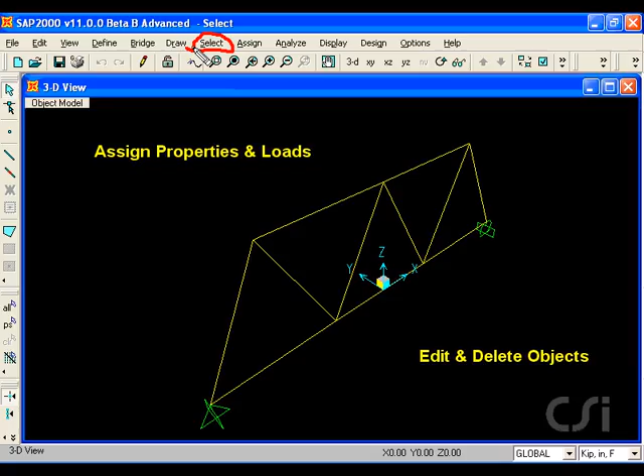This tutorial will illustrate some of the select options available within SAP 2000. Selects are used to assign properties and loads, to edit and delete objects, and to selectively display tabular data.

The first select is the pointer window command, which is also available on the toolbar. It is active when depressed. A single click on an object will select it. This same command can be used to do a window select. Drawing the window from left to right will select all objects that lie completely within the window.

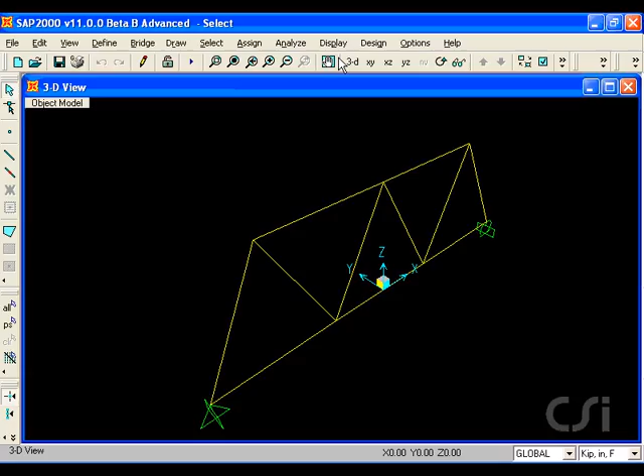If we use this command once more, but this time draw the window from right to left, not only will any object lying within the window be selected, but any object touched will also be selected. Note that selected objects are highlighted with dashed lines.

Next, we will use the polyselect, which is similar to a window select in that any objects which lie within the polygon are selected. Next is the intersecting polyselect, which selects any objects touched by the polygon or which lie within the polygon.

A powerful selection command is the specified coordinate range select. Here we can identify if the objects need be completely within the range to be selected, what types of objects to be selected, and the range in each direction. Here we are asking all joints to be selected.

We will use the same command once more. Again, only selecting point objects, but this time we will set the selection range in the X direction to be between the values of 0 and 300. This selects only the joints on the right half of the truss.

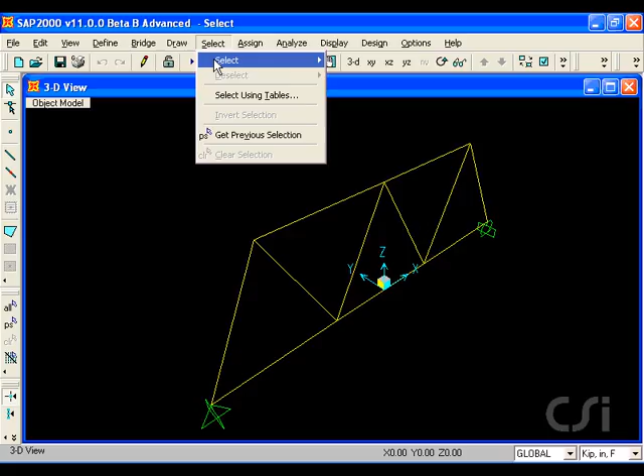All objects lying in a given plane can be selected by using the Click Joint in Plane commands. The Select Lines Parallel To command allows for the selection of all line objects parallel to a given line, axis, or plane.

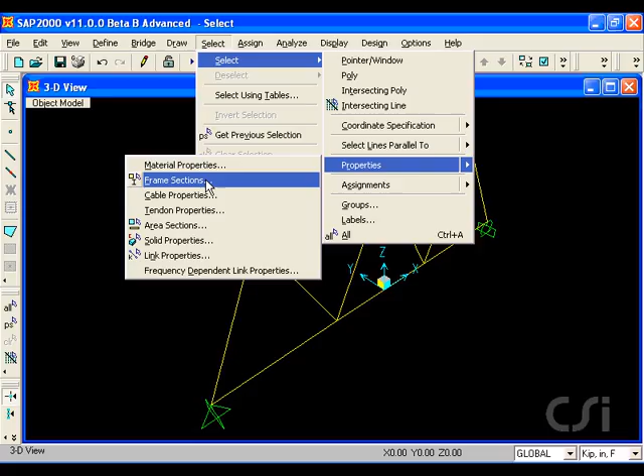The Select Properties command allows for the selection of objects by the properties assigned to them. Here we select by frame sections. We can also select by joint assignments. Here we wish to select all supports that are restrained in the global X direction.

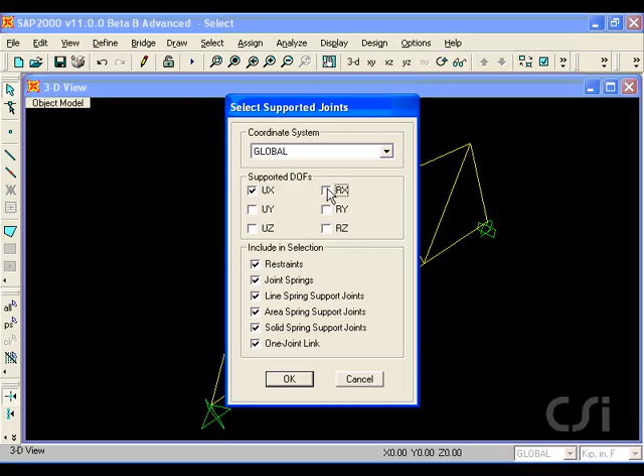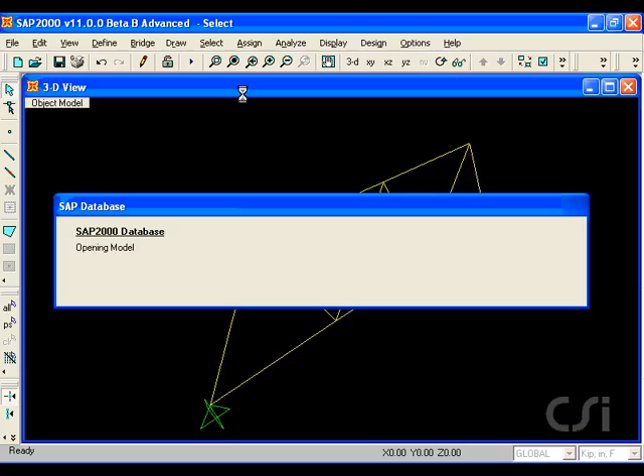Note that the program has selected only the left support, as the right support is free to translate in the X direction. The Select Using Tables command is a powerful option for the non-graphical selection of objects. Here we check the connectivity data box.

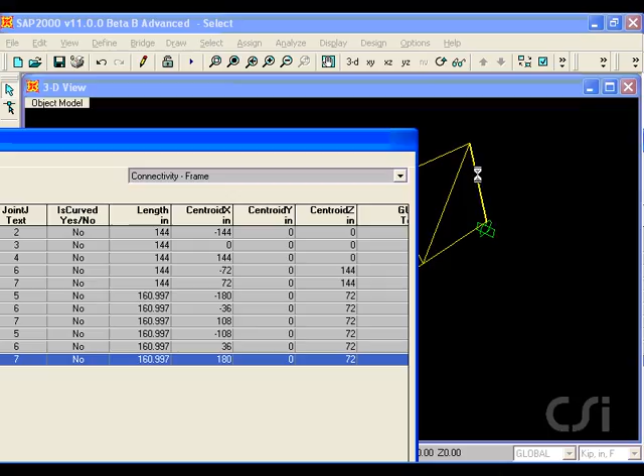Clicking on frame number 11 highlights this object in the model. Next, we will filter the table to include only frame objects whose x-centroid is greater or equal to 0.

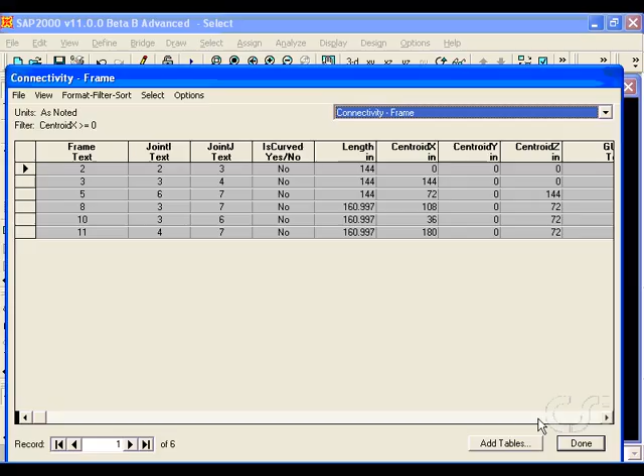Then we use the select command to select all the frame objects in this reduced table. Note that only the frame objects whose centroids are at or to the right of the origin are selected. A very useful command is the Get Previous Selection command, which also shows up on the toolbar. Clicking this button simply selects the same objects from the previous selection.

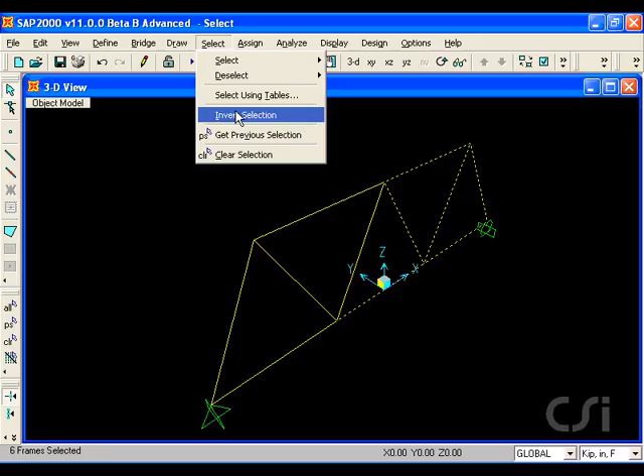The Invert Selection command selects all objects not selected at the time the command is invoked. Last but not least is the Select All command, which selects all objects, and the Clear Selection command, which is useful if you have made a mistake in your selection. This concludes this tutorial.